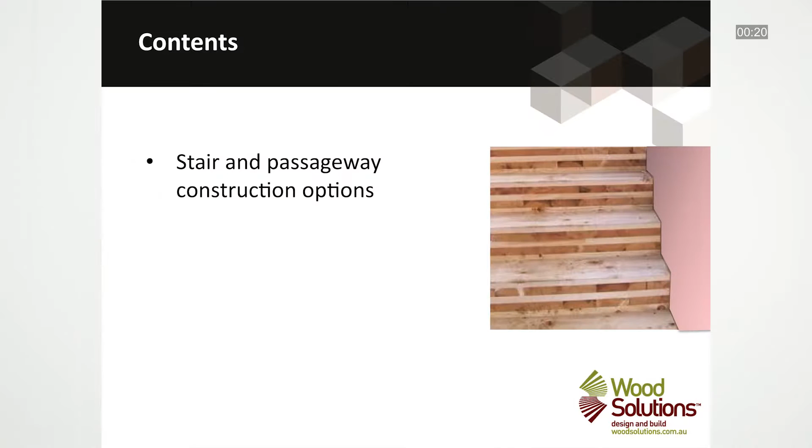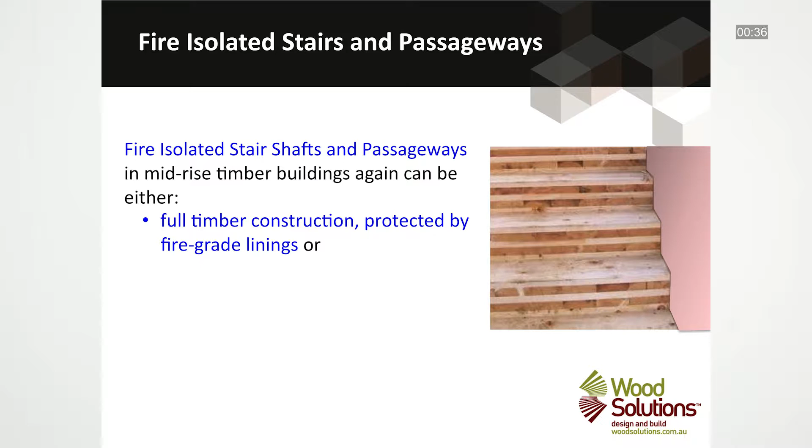In this module, we will examine the use of timber systems in fire-isolated stairs and passageways. In this presentation, we will cover the different stair and passageway construction options, the NCC requirements for sound and fire, and the NCC concessions for stairway components. Fire-isolated stair shafts and passageways in mid-rise timber buildings can be either full timber construction protected by fire-grade linings, or a hybrid with other materials such as concrete or masonry.

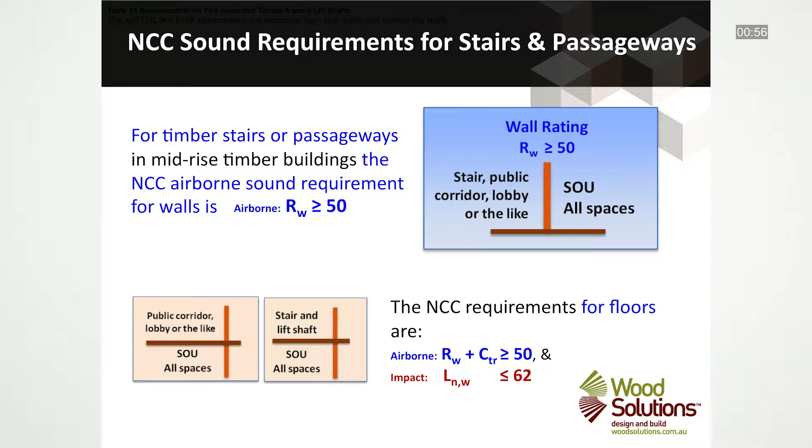For timber stairs or passageways, the NCC sound requirement for walls is an airborne performance value Rw greater than or equal to 50. The NCC requirements for floors are, for airborne sound, an Rw plus Ctr greater than or equal to 50, and for impact sound, an Ln,w less than or equal to 62.

The FRL, RISF or MRISF values required for fire-isolated stairs and passageways are the same as those required for lift shafts. For general lightweight timber framed stair shafts and passageways, these are as follows. For Class 2 and 3 residential buildings, for load-bearing walls, an FRL of 90/90/90, and for non-load-bearing walls, -/90/90.

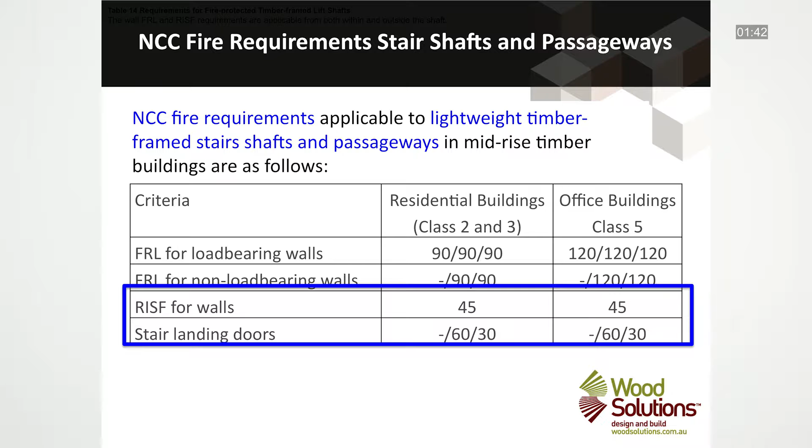For mid-rise office buildings of 4 stories and above, the FRL required is 120/120/120 for load-bearing walls and -/120/120 for non-load-bearing walls. For all these 3 classes, an RISF value is also required of 45 minutes, and for the stair landing doors, an FRL is required of -/60/30.

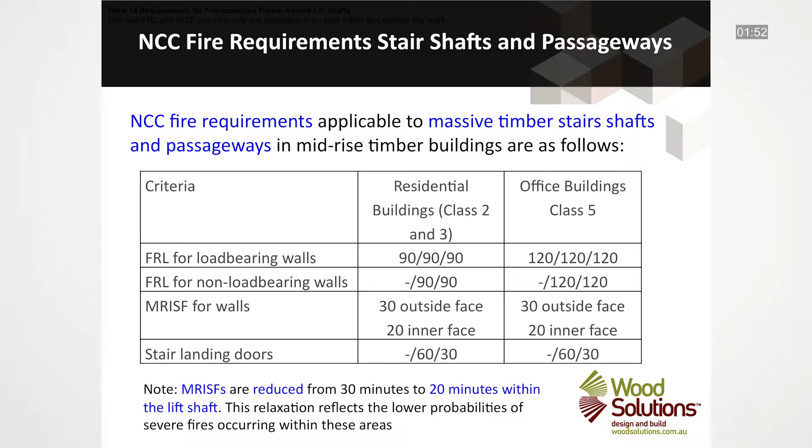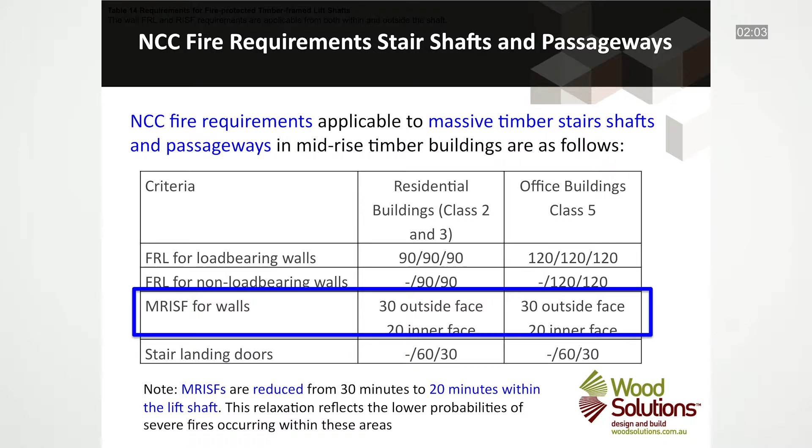For massive timber frame stair shafts and passageways, the NCC fire requirements are similar to the general requirements for lightweight construction. However, the MRISF values are different, again with a 30-minute requirement on the outside face of the shaft and a 20-minute requirement on the inside face, which reflects the lower probabilities of severe fires occurring in these areas. In terms of the fire doors to fire-isolated stairs or passageways, these are required to achieve an FRL of -/60/30.

This slide shows sections through 2 types of frames. On the left, a timber fire door frame, and on the right, a steel fire door frame. It should be noted that all fire door assemblies need to have a required FRL determined in accordance with AS 1530.4 and AS 1905.1 as appropriate.

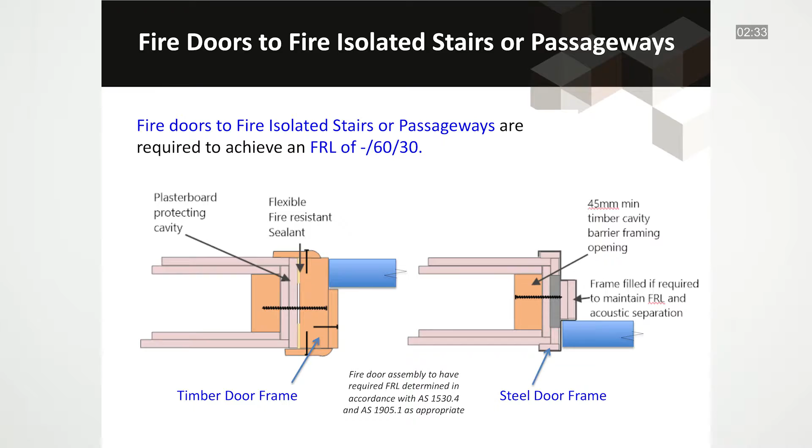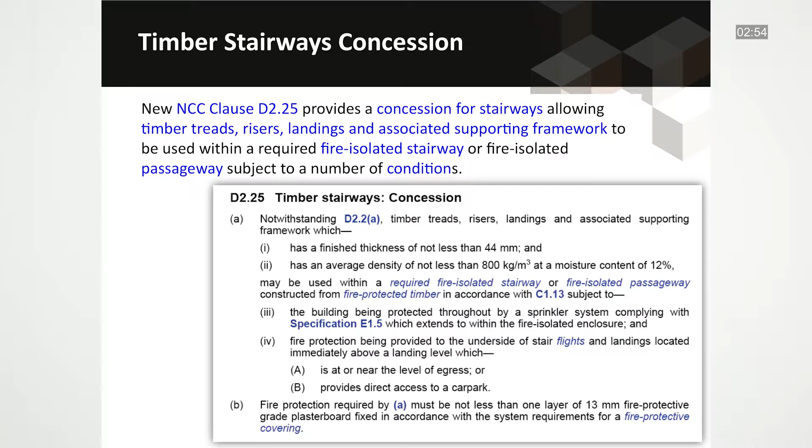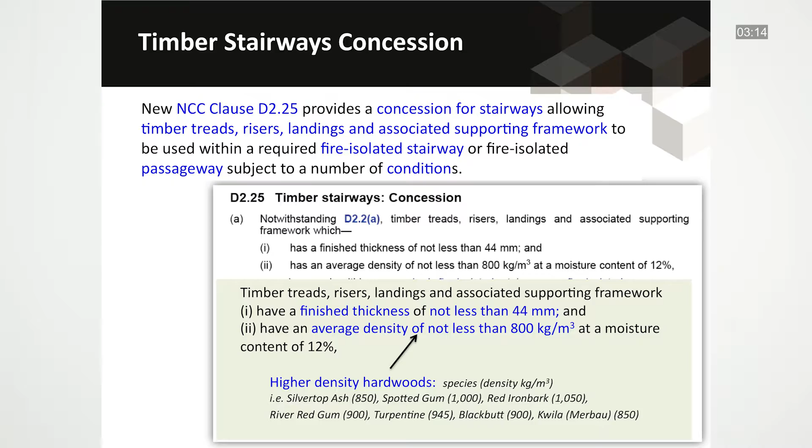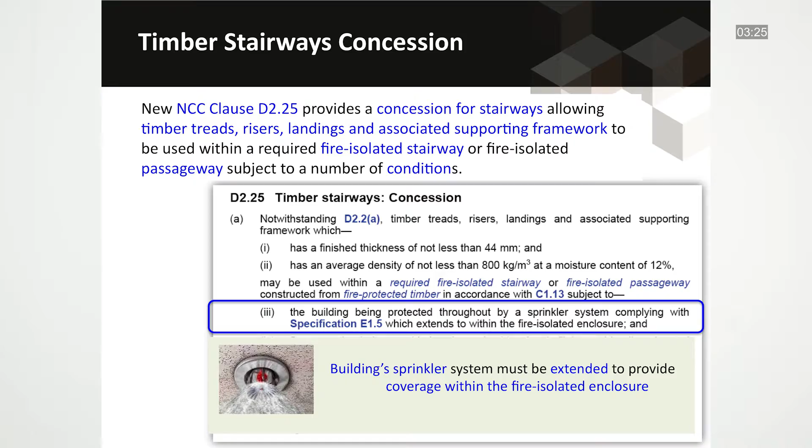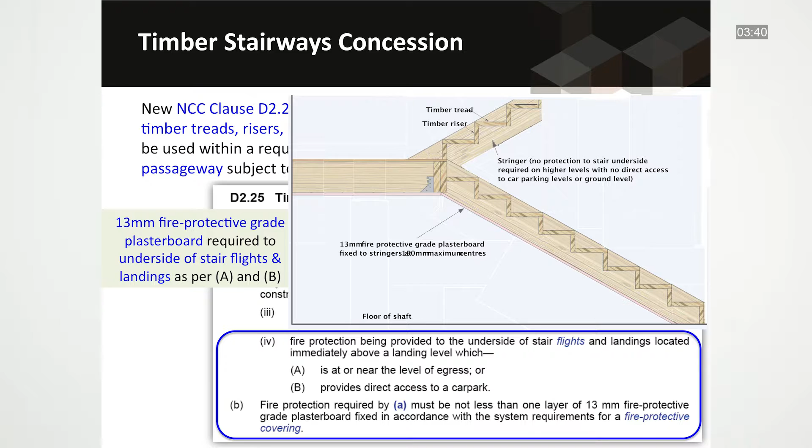The second condition is that the building's sprinkler system must be extended to provide coverage within the fire-isolated enclosure. And thirdly, that 13mm fire protective grade plasterboard is required to the underside of stair flights and landings, which is at or near a level of egress, or provides direct access to a car park. Typically, it is at this level where people commonly use the underside of stairways as unauthorised storage areas, often for combustible materials.

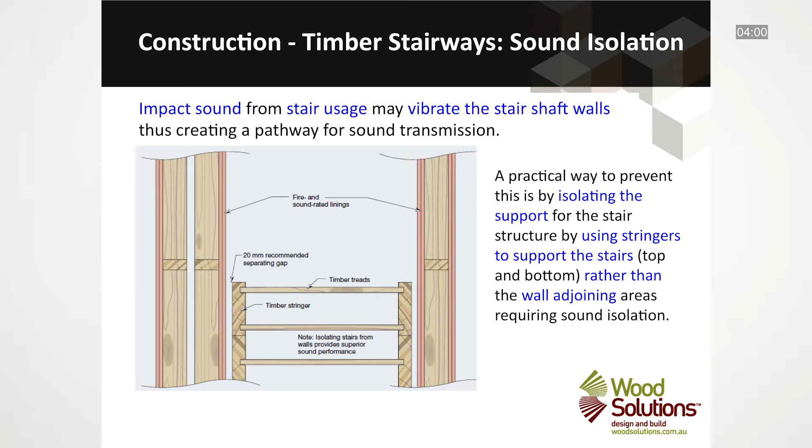From an acoustic perspective, impact sound from stair usage may vibrate the stair shaft walls, thus creating a pathway for sound transmission. A practical way to prevent this is to make the stair self-supporting, isolating the stair structure by using stringers to support the stairs rather than the stair shaft walls.

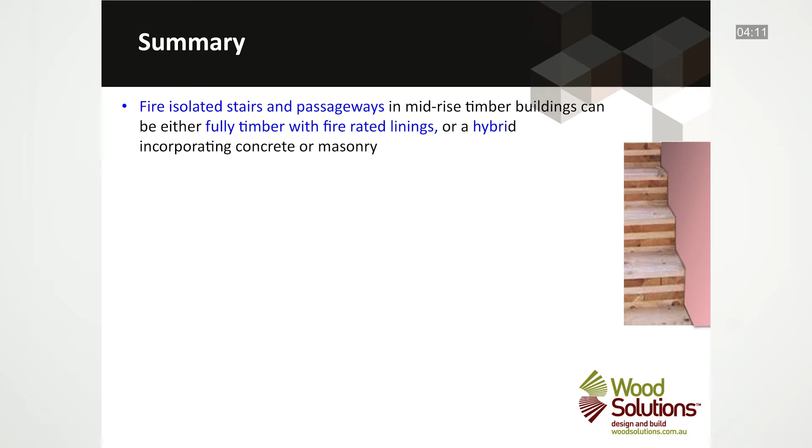So in summary, fire-isolated stairs and passageways in mid-rise timber buildings can be either fully timber with fire rated linings or a hybrid incorporating concrete or masonry. The NCC sound requirement for walls is an airborne requirement Rw greater than or equal to 50, and for floors an airborne requirement Rw plus Ctr greater than or equal to 50, and an impact requirement Ln,w less than or equal to 62.

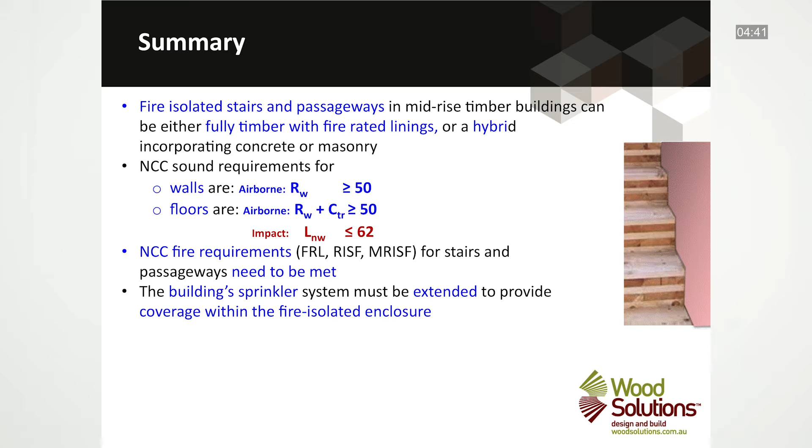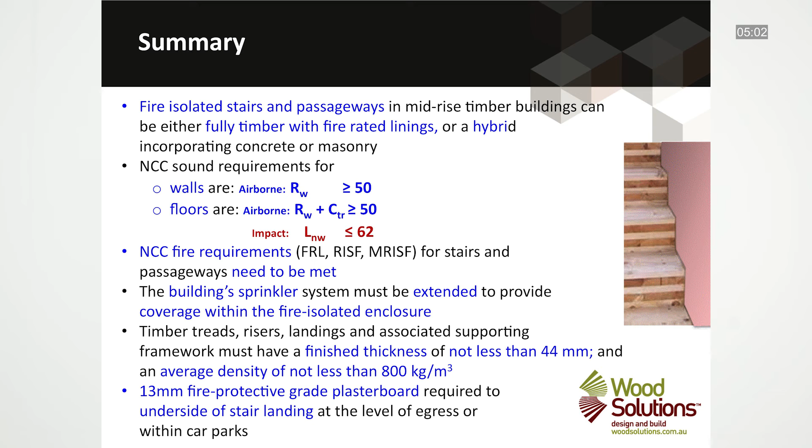NCC fire requirements for FRL, RISF and MRISF for stairs and passageways are specified and need to be met. The building's sprinkler system must also be extended to provide coverage within the fire-isolated enclosure. Timber treads, risers, landings and associated supporting framework can be used, but these must have a finished thickness of not less than 44 millimeters and an average density of not less than 800 kilograms per meter cubed. And 13mm fire protective grade plasterboard is also required to the underside of stair landings, at the level of egress or within car parks. For further information on wood and wood products, visit woodsolutions.com.au, the website for wood.